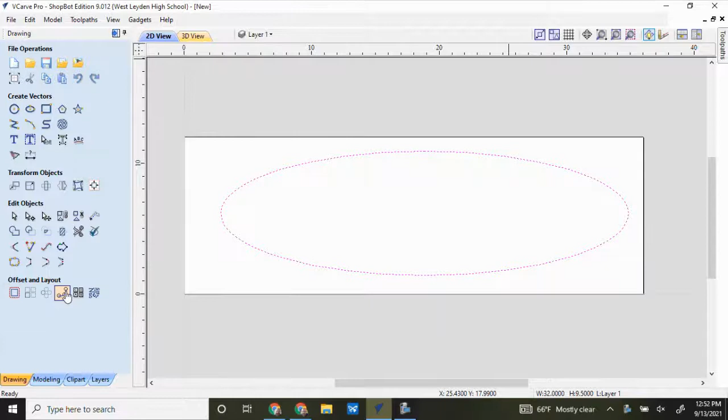All right, guys, so we're going to do a quick tutorial on how to place the holes for the screws for your skateboard wheels and how to make sure that they're in the right spot and that they are symmetrical so that the skateboard is going to roll the way that it should, and also so that they are placed in the right spot. So if this is my skateboard outline, the first thing I want to make sure to do is I want this to be centered on my board here.

The best way to do that is to make sure it's highlighted. Remember, you can highlight by clicking on it, or you can also drag to the left. Once you have that done, you hit the Align Selected Objects tool. And what we want to do is we want to center my oval, the outline of my board, on my wood here. So I'm just going to align it to the material, and that's going to be the one in the center, and it clicks it right into the middle there.

We're good to go. Now, what we want to do is we want to have 4 holes here, and we want to make sure that they're in the right spot. So my suggestion is to measure from center to center on the base for the wheels for the skateboard, so that you know the X distance and you know the Y distance.

Once you know that, the easiest way I have found is to make a square—actually, we're going to make a rectangle. Let's just say, now this is going to be different on yours, so please don't use 2 and 1.5 on yours unless it has actually 2 and 1.5. It's going to be different on yours. But let's just say that the distance in the X direction between the 2 holes on the base of the wheels is 2 inches, and in the Y direction, up and down, it's 1.5 inches.

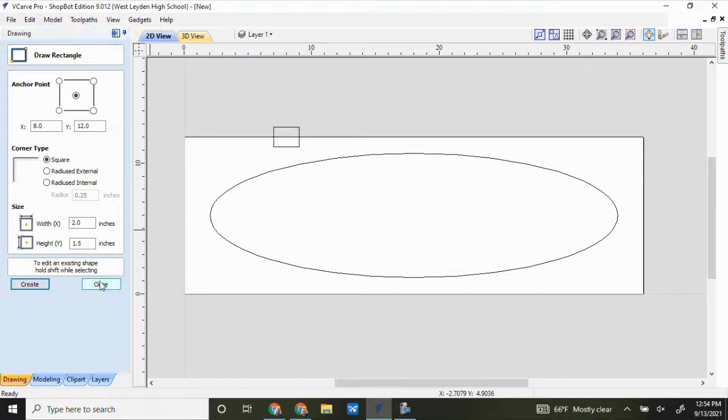What we're going to do is we're going to make a rectangle that size, so it's going to look like that. And then I'm going to take it and I'm going to move it where I want it. Now, where are we going to put it? Well, where it goes this way in the X direction, that's really kind of up to you. You're going to have to figure that out a little bit.

But as far as in the Y direction, we need to make sure that it's right in the middle of this board. Obviously, you wouldn't want to attach your skateboard wheels with the middle of the wheels there. So how are we going to do that? Well, we're going to use the Align tool again.

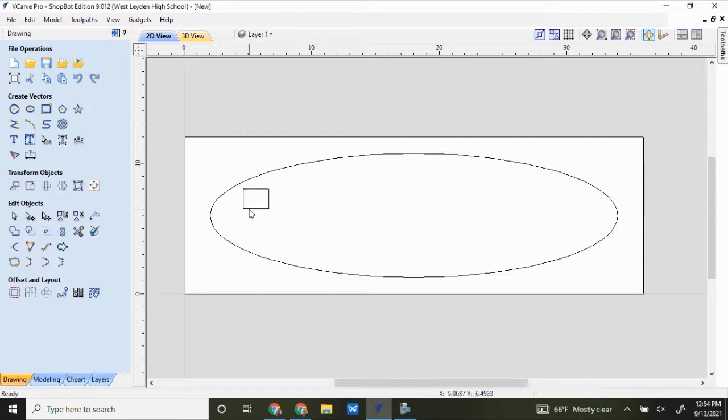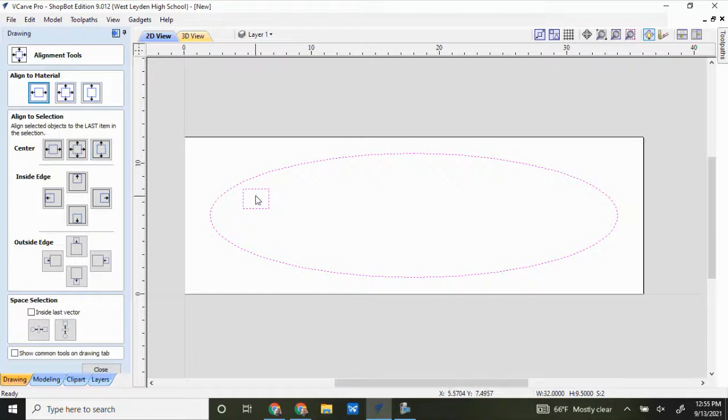Here's how it works. We select the rectangle that we made, and then we're going to hold down Shift and select the board. So now we have 2 things selected. And now instead of aligning it to the material, we can align it to the selection. So here's my selection. I'm going to align it up and down, just up and down to the selection, because I don't want it to move this way. Just up and down on the selection, and we're going to go there. And now we know that that rectangle is aligned right in the center of my board.

All right, well, now what we need to do is we need to figure out the holes. So now we're going to make a circle, and this is already set up for me here, but the circle itself, we're going to use the diameter as 0.25. That'll be plenty enough room for my screw. You might want to double check your screws, but the screws that we're using in our class, 0.25—that's actually the diameter of the drill bit we're using itself, so it works out nicely.

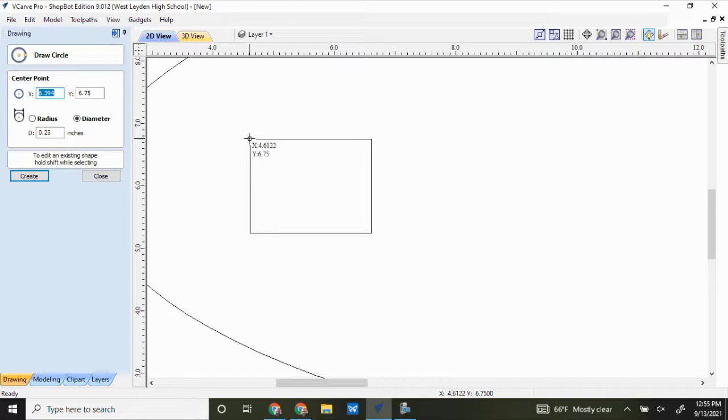We're going to set our diameter at 0.25, and then make a circle on each corner of the rectangle, and that's where we want our circles. Since we measured from center to center for this distance and that distance, we can make the circles and be confident they're in the right spot.

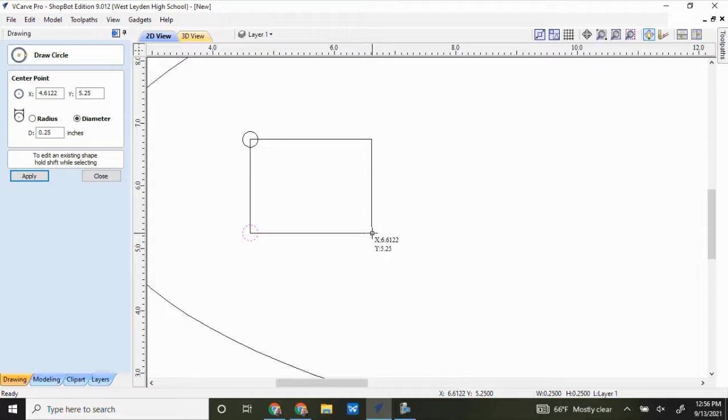Look how easy this is. If I hover over here, it's asking where I want to make the circle, and when it clicks in the corner, I click and my circle is made there. Then I go down to this corner and click, down to this corner and click, and down to this corner and click. Now I hit apply and close, and I have my 4 circles in the right spot. I don't need this rectangle anymore, so I'll delete it. Now we're good to go - we have our 4 circles ready to be drilled out, in the right spot.

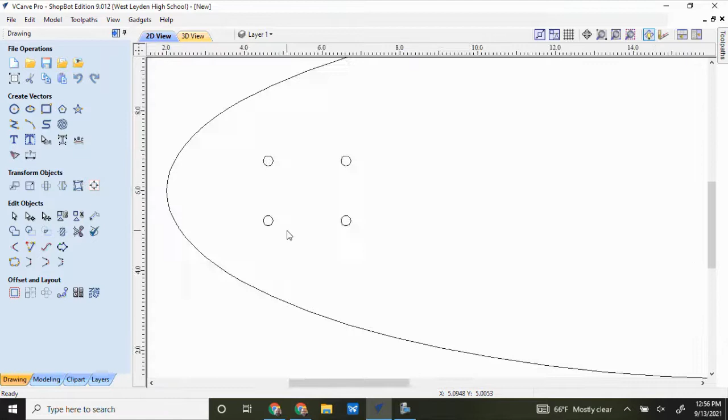If you'd like to check that they're the right distance apart, use the measuring tool. Zoom in, click on the measuring tool, and you can see how it measures from the center of one circle to the center of another. Right here it says 1.5 inches. If I measure from the center of that one to that one, it should be 2 inches, and it is. From that one to that one, it should be 1.5, and it is.

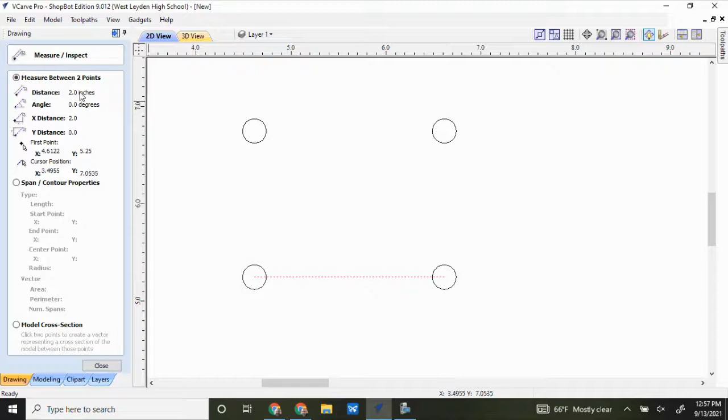And from that one to that one, it should be... let's do it right here. Oh, I'm doing it wrong, let's start over here. From the center of this one to this one, it should be 2 inches as well, which it is. So now I know I have those spaced out the right way.

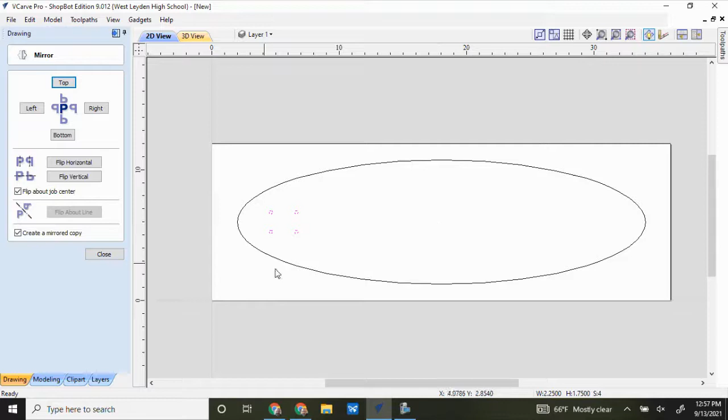Alright, 2 more things. How are we going to get the dots on the back? Well, we don't have to do this again. Since we know this is centered here, we can highlight all of those and use mirror selected objects. I'm going to create a mirrored copy, meaning I'll have 4 more circles, and flip it around the horizontal. Since this is in the center, flipping it on the horizontal will make those 4 circles appear in the back. Now they're good to go.

The last thing, I need to assign my tool paths. I'm going to select all of those and use the drilling tool path. The start depth is 0. The cut depth is not going to be 0.725 - we're going to go a little deeper than the board, so 0.745. If your board was 0.75, you could set that at 0.77. If your board was 0.725, you could set that at 0.745, just a little bit deeper.

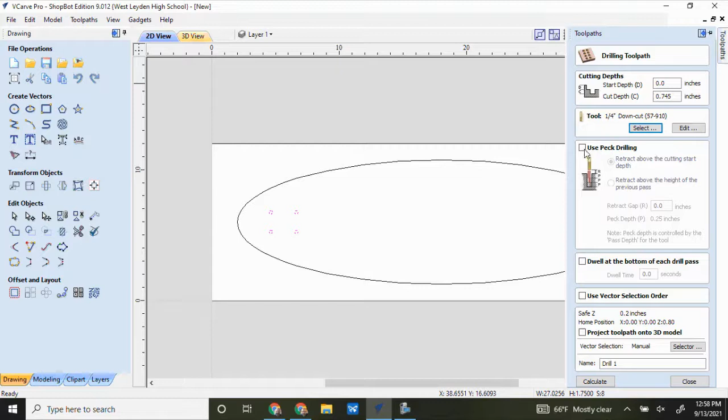We're going to use a 1/4 inch down cut, and we're not going to use peck drilling. I'll have to calculate it. I'll say OK. Now if I reset my preview and preview all toolpaths, you can see it's going to make my holes for me. There you go. Good luck with your design.